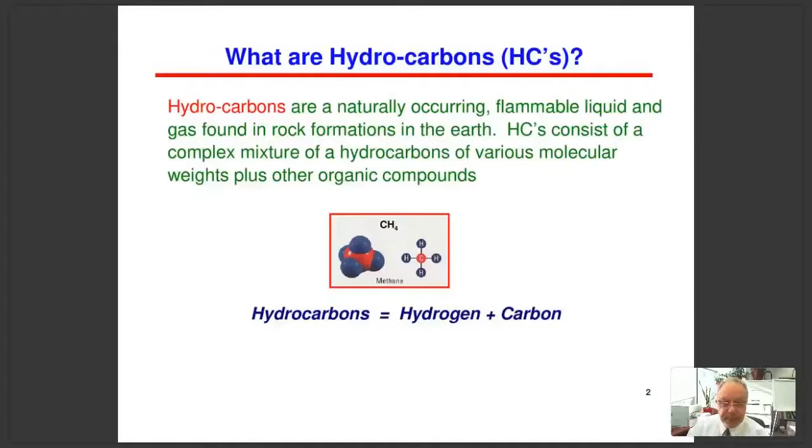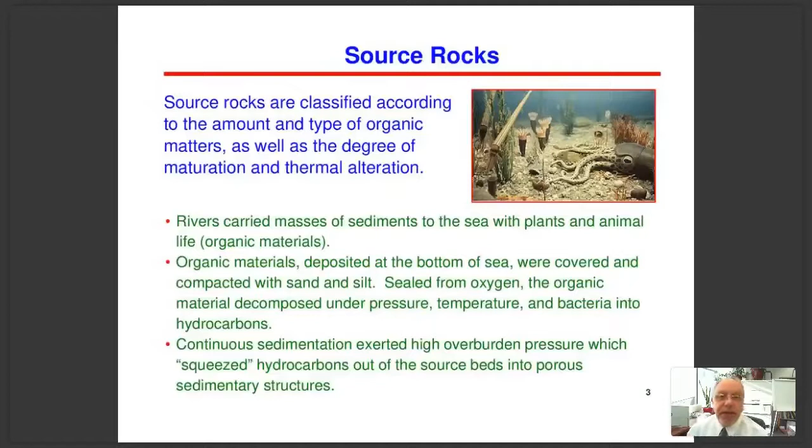So hydrocarbons have been generated from organic material many millions of years ago. Some organic materials like plants and animals were buried, and as more layers of rocks accumulated on top of it, in the absence of oxygen and maybe the presence of some bacterial content, these organic materials started to degenerate and form oil and gas. So basically a source rock, which is usually shale, is behind the generation of hydrocarbons, oil and gas.

Unfortunately, we are running out of the conventional, and basically we are looking now at a different source, which is the unconventional oil and gas. Unconventional means a different kind of hydrocarbon, maybe heavier, not easy to produce, but there's plenty of it on Earth, and we believe we have lots of it for future use. Some of these unconventional sources are shale gas, methane, tight sand - very challenging types of energy. But now we have new technology like drilling horizontal wells and multi-stage frac that we use to exploit the unconventional.

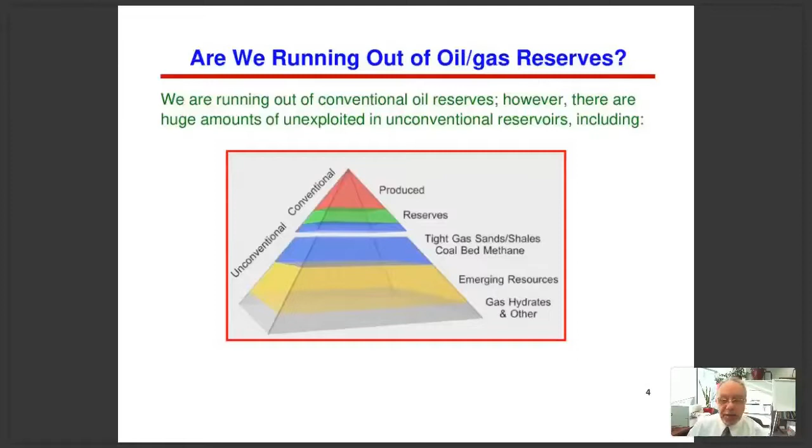Now, how about renewable energy? Oil and gas that we've been using for many years - whenever we use it, we burn oil or gas, which means we emit carbon dioxide into the atmosphere, which is CO2.

CO2 has a negative impact on the environment. Basically, it will cause the greenhouse effect. It will harm our ozone layer, which means it will allow more ultraviolet light to hit the earth, which is harmful to the environment. Also, it will increase the temperature of the earth, which is not favorable. Also, it's bad to inhale - CO2 is not good for human health. So this is the outcome of using fossil fuel.

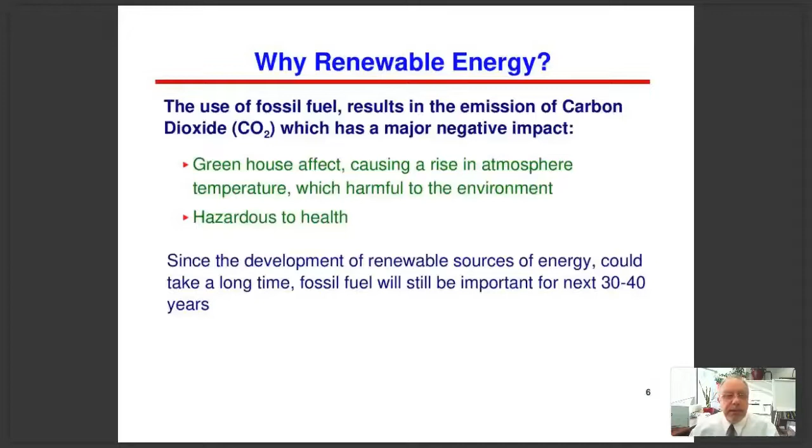So obviously we're looking for a renewable source of energy that is friendly to the environment, like solar energy, wind, hydropower. All of these are renewable sources of energy that do not hurt the environment. However, these renewable sources of energy will take quite a bit of time to develop so we can use them easily in the future. But for now, we're still depending on fossil fuel, oil and gas, which makes nearly 85% of all the energy we use today. So we have to be patient until renewable energy becomes more available.

Now, when we talk about the oil industry, it's a very diverse industry. It has three main phases that we're going to talk about. We start with the upstream, which we're going to focus on in this webinar - it involves exploration, development, and production operations.

So in this phase, we have to do some work on seismic exploration to find where we're going to drill our oil and gas wells, and how we're going to develop a field and produce it and maximize the production. That is the upstream oil and gas.

The midstream is the second phase, where we need to transport what we produce from our wells, which is oil, gas, and water. We have separation facilities to separate the gas from the oil and the water, and basically we get these products for use. The oil and gas, obviously, we're going to need them. The water, we dispose of it.

Now, let's move to the downstream, which is the refining and petrochemical segment of the industry. The crude that we produce cannot be used the way it is - we have to refine it. We have to extract products that we can use, like diesel and gasoline. Also, the petrochemical segment uses oil and gas to produce products like plastic, paint, and even some medicine. So that is the downstream.

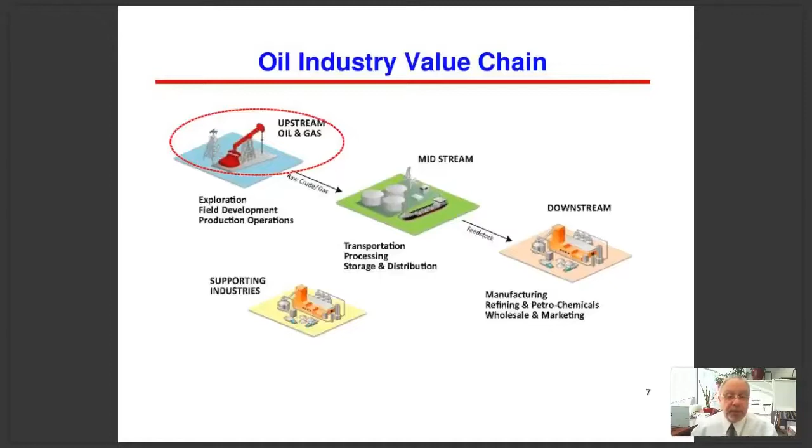The second part of it is the drilling. We have to drill wells, whether it's onshore or offshore, and we're going to show you a video on the drilling aspects. And the third part of this phase is production - how we're going to produce oil and gas, whether it's onshore or offshore.

Now, how can we find oil and gas, and what makes commercial production? Basically, 4 elements must be present.

A source rock is where oil and gas are generated. Usually it's a shale where organic material is buried, and eventually it degenerates into oil and gas.

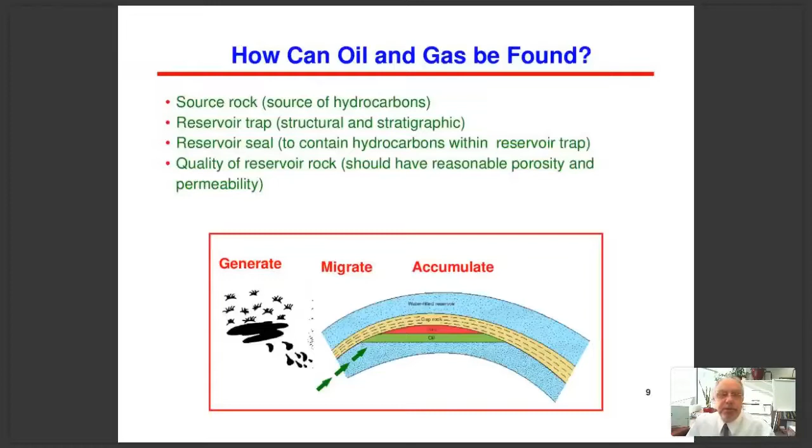Of course, we also need a good quality rock in this trap. It should be porous and permeable, so we can produce oil and gas from it.

Now, when we start exploration, if we have a very large piece of land to work with, like maybe 100,000 square kilometers, it is too expensive to run a seismic survey, because seismic costs nearly $100,000 per one line, per kilometer. So we start with a faster tool.

It's called air surveillance. We fly with an airplane equipped with very sensitive equipment, running magnetic survey, gravity, or stress survey. The purpose of this survey is to allow us to examine this large block of land and define the areas that are prospective. It could be only 5 or 10% of the total area.

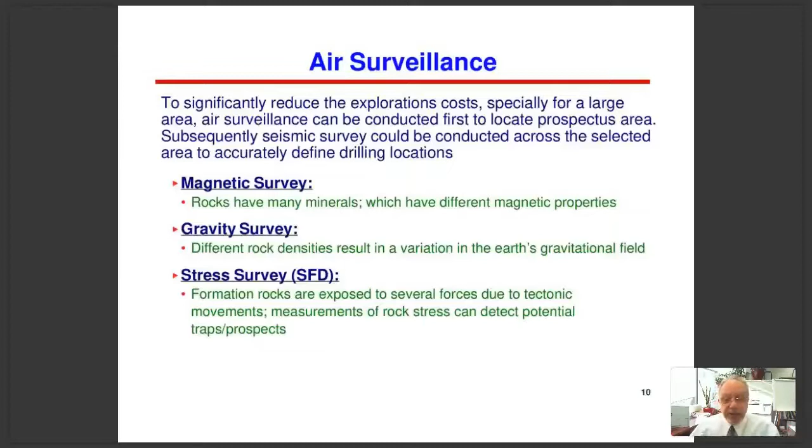Once we have defined this prospective area, then we run seismic only across this part of the big block of land. Seismic is more accurate. It will help us define the location of the well and the depth where we should be drilling. That is air surveillance.

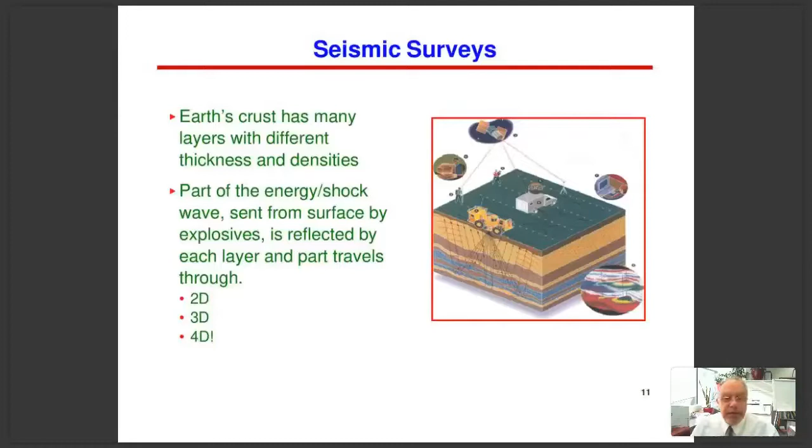From this picture, we can locate the traps or prospects where we intend to drill oil and gas wells. Now, we can also run seismic survey offshore, not just onshore.

You can see there is a seismic boat with air guns. It has compressed air, so we send a blast of compressed air that travels to the bottom of the sea, and below that, this blast of compressed air signal reflects back to the surface.

The ship is also pulling another line called the streamer, which has geophones - the listening devices - to listen to the reflection. All of this data is interpreted, and our geophysicist generates a map to show us what the subsurface geology looks like and where we're going to find traps.

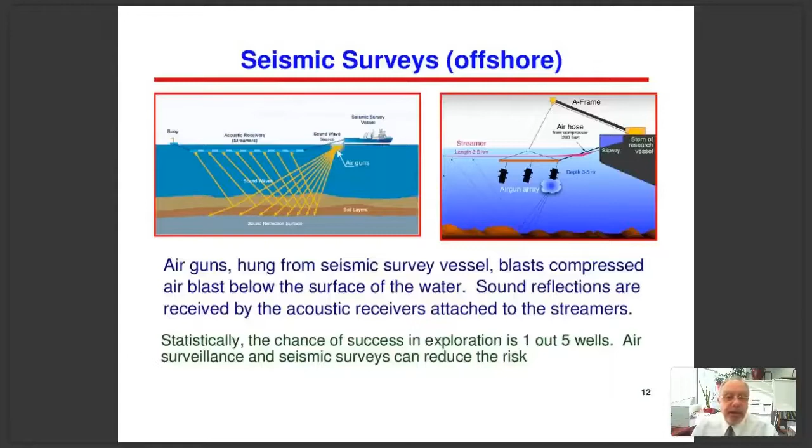Now, when we talk about drilling wells, we have different kinds of wells in the industry. We start with exploration wells. These are the first wells we drill in a new field to verify the data obtained from seismic - that yes, there is a trap, there is a potential for oil and gas.

So the first well is the risky well. Statistically, the chance of success in exploration is 1 out of 5. We might have to drill 5 wells just to have one discovery.

Once we have a discovery, then we drill appraisal wells, basically to define the edges of the field. So we drill 2, 3, or 4 wells on the edges of the field.

Once we define the size of the field and its edges, we drill development wells, which are in the center of the field, to produce oil and gas and exploit the reserve in a reasonable time. Of course, we also drill other wells like disposal wells, because whenever we produce oil and gas, we also produce water with it, since water was there first.

And this water, unfortunately, is saline, so we have to dispose of it. So we drill disposal wells and we dump the water in saline aquifers so we don't hurt freshwater aquifers.

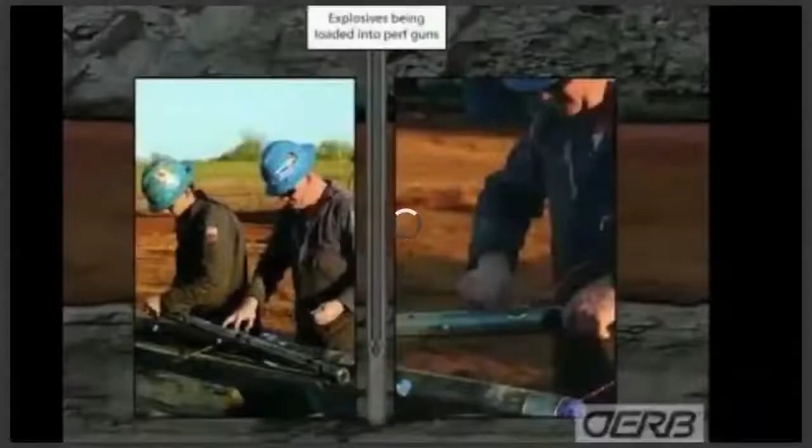The blowout preventer, or BOP, is installed on top of the casing head before drilling commences. It contains high-pressure safety valves designed to seal the well hole and block the escape of underground gases or fluids in order to prevent a blowout from occurring.

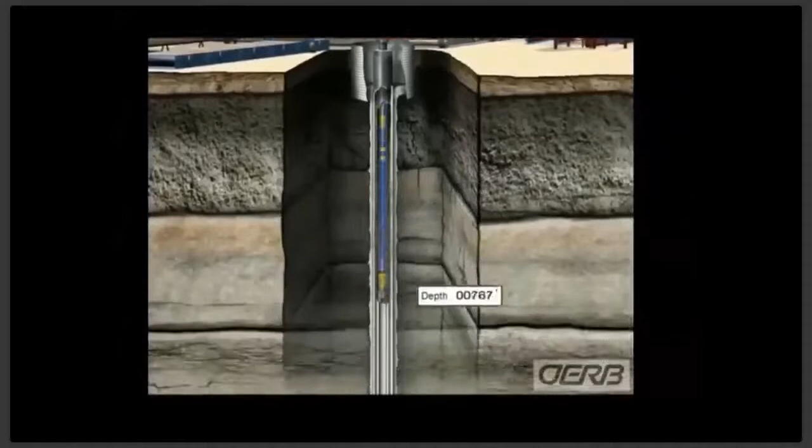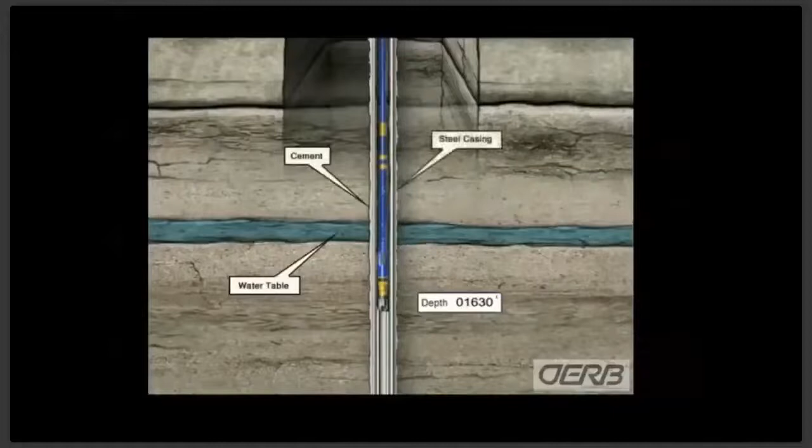Drilling begins with a hole of a designated surface depth, usually about 50 to 100 feet below the water table. Special care is taken to prevent contamination of the groundwater by isolating the water table from the well with cement and steel casing. The bit is the cutting element used in rotary drilling.

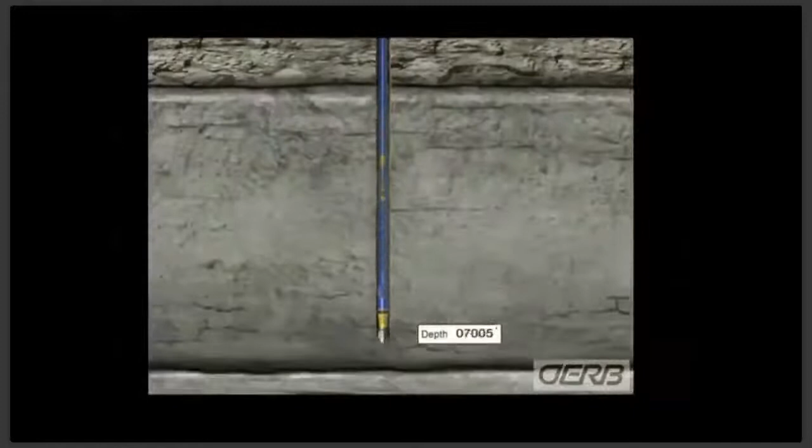As the bit turns, it crushes the rock efficiently, then shoots fluid out to loosen and carry these rock chips up to the surface. New sections of pipe are added to the drilling string as the bit drills deeper.

When the hole reaches a designated depth, the derrick hands circulate fluid through the hole to condition it for logging, the process of measuring and recording the characteristics of the well. The logging information lets the oil company determine if the well indeed can produce oil or gas. At this point, the company will decide whether the well is to be completed or plugged and abandoned.

If the well is designated as a producer, the crew inserts the pipe back into the hole to ensure that the hole is still intact and circulates mud through it again to test the casing. If everything tests positively, they remove the drill pipe and rack it.

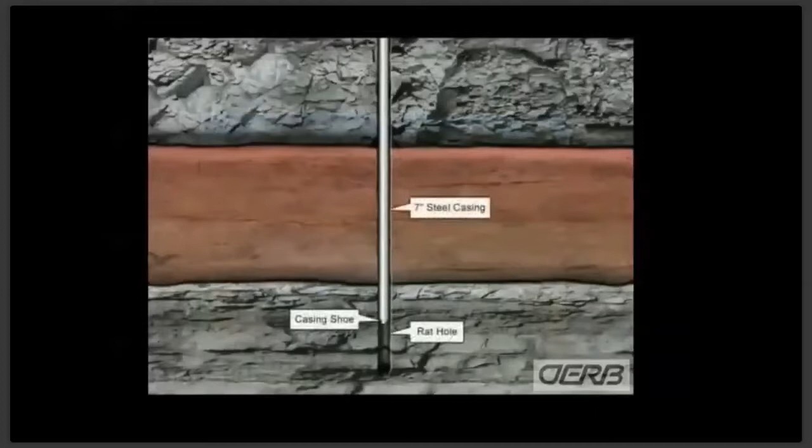At this point, the crew inserts the last string of production casing that runs the entire length of the hole and cements the casing in the hole. The production crew then brings in the workover unit and rigs it up to prepare the hole for production.

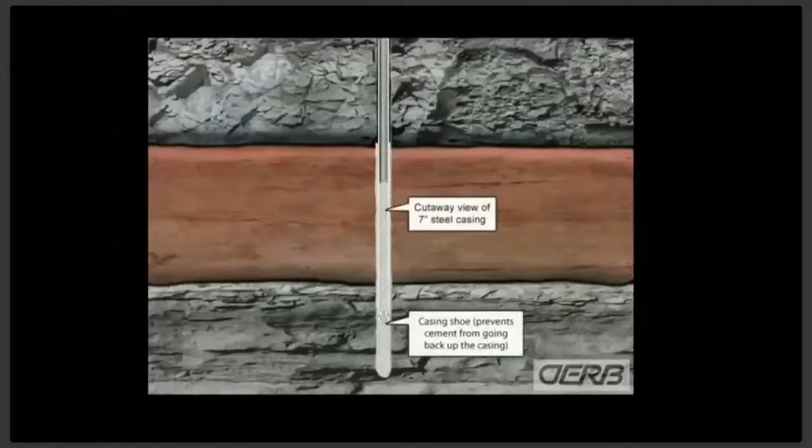The crew runs small diameter tubing into the hole as a conduit for oil or gas to flow up the well. Next, the workover unit trips out of the hole and picks up a perforating gun, which the crew lowers into the well to production depth using a thin metal cable called a wire line.

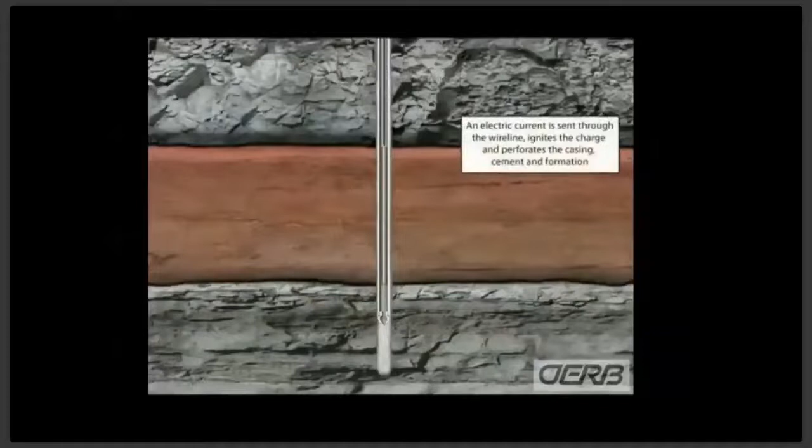An electrical signal is sent down the wire line, firing the gun and igniting explosive charges. These charges create holes through the cement, casing, and formation, connecting the wellbore to the reservoir.

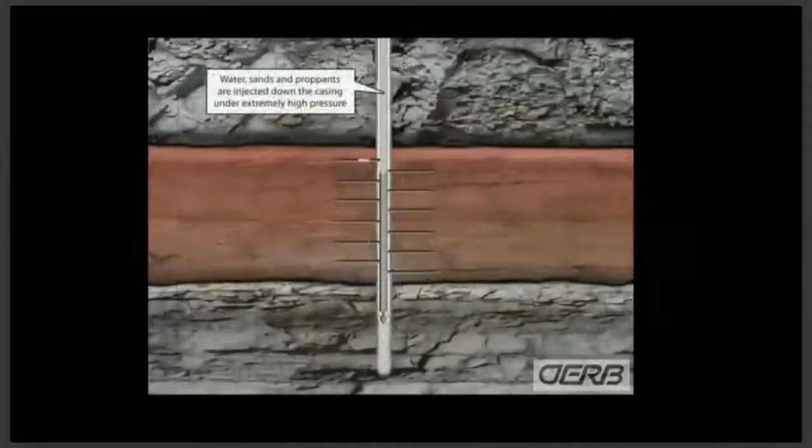To stimulate the flow of hydrocarbons, sometimes it is necessary to frack the well. This involves pumping water, sand, and fluids under extreme pressure down the casing and out through the perforations. The process fractures or forces cracks into the formation. The remaining particles will hold the cracks open, releasing the oil or gas.

Monitoring the flow enables the crew to determine the best size for the choke, the device that controls the flow of the oil or gas.

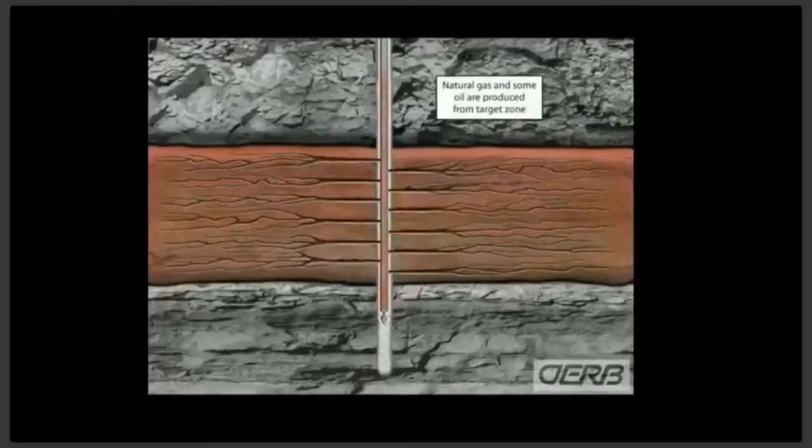Hydrocarbons were created from organically rich deposits subjected to tremendous heat and pressure. This same pressure has kept the hydrocarbons locked in the formation for millions of years. Once the pressure is released, the hydrocarbons are allowed to escape through the fractured zone and flow into the wellbore.

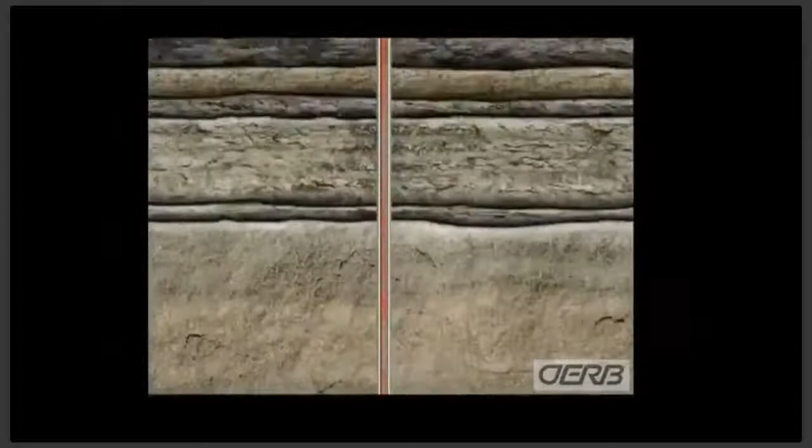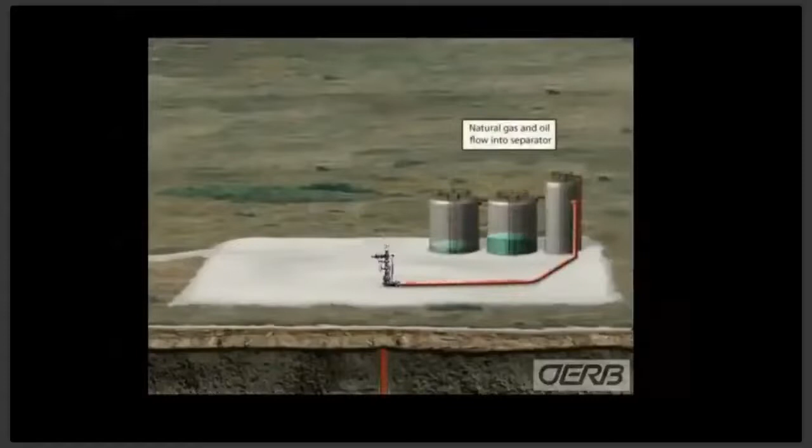The oil and gas can now travel up the casing string. The wellbore is isolated from the surrounding formations with casing and cement, preventing any contamination. The final step is to install a pump jack or production wellhead called a Christmas tree on the well. It is then time to produce the well and plan for any future field development.

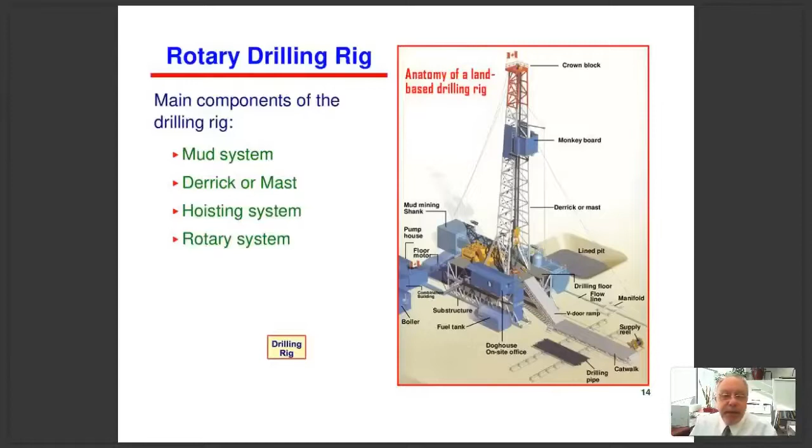You also see a tower, or a mast, or a derrick. From the top of the derrick we hang our hoisting system. The hoisting system allows us to pull the pipe out of the hole, maybe to replace the drill bit every now and then. So it has to be powerful enough to pull out of the hole maybe 7,000 feet of steel pipe. So these are the main components of the drilling rig.

Some of the equipment we use during drilling is the blowout preventer, which you've seen in the video. It's a set of high pressure valves that allow us to control the well while drilling, because sometimes we drill through a zone of high pressure that could cause a kick or a blowout, which is very dangerous. You might have heard of several accidents where a blowout occurs and the drilling rig catches fire.

So the blowout preventer, or BOP, is only used during drilling operations. Once the well is drilled, we get rid of it and replace it with the Christmas tree. The Christmas tree has sets of valves to allow us to control the well, shut it in if needed, or run equipment down the well.

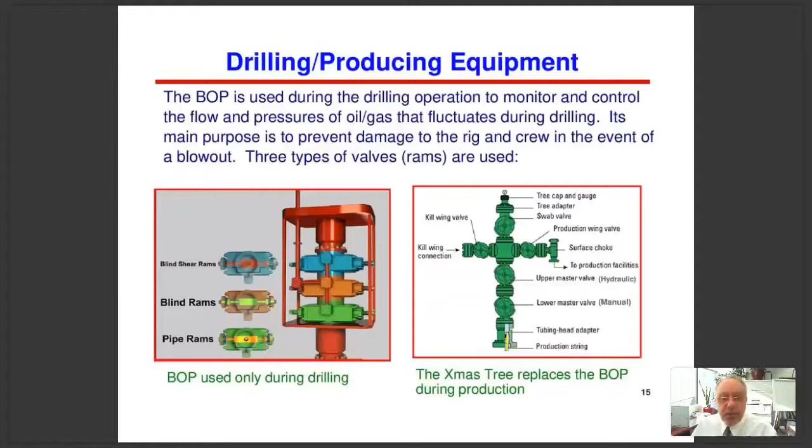At the top there is a tree cap. If we wanted to run, say, a pressure gauge or tools down the well, we can open the top and run the equipment down. There's also a choke at the surface that controls the production rate from the well. So these are some of the equipment you see at the surface while drilling and completing the well.

The purpose of this mud is to clean up the hole from the cuttings. As we create the hole, we crush the rocks, and we have to bring the drill cuttings to the surface to clean the well bore and avoid getting stuck in the hole. Also, the mud cools off the drill bit, which is grinding the rocks and gets too hot. If we don't cool it off, it can get damaged quicker. Also, the mud we circulate in the well keeps the hole from caving or collapsing during drilling.

We have two types of mud: water-based and oil-based. A water-based mud is the most common and the cheapest, made of clay mixed with water. There are, though, some situations where we have to use an oil-based mud, because some formations are sensitive to fresh water, so instead of a water-based mud we need an oil-based one.

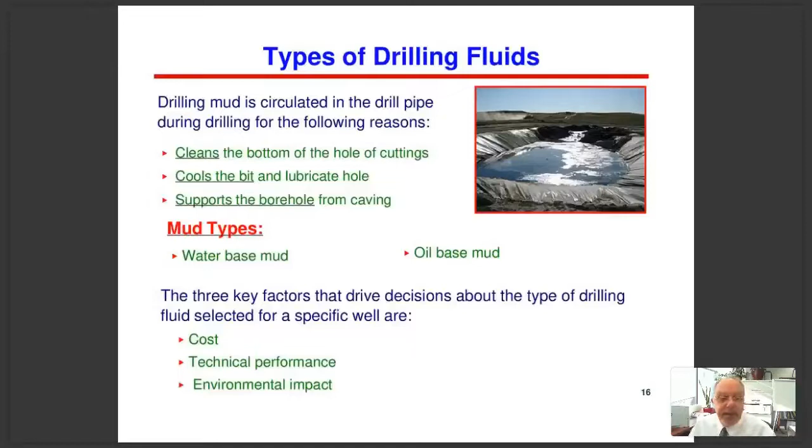An implication of oil-based mud is that when we drill and cuttings come to the surface, these cuttings will be oil stained. So before we dispose of them at surface, we have to go through a cleaning process, because oil is not good for the environment. Selecting the mud depends on cost, technical performance, and environmental impact, so the drilling engineer has to make that decision.

So basically we produce oil and gas. We need to understand how important it is to test the well, so we can tell what sort of facility size and design we should implement, whether it's tanks, flow lines, or valves. All of these will be determined based on how much we can produce from a well. Also, from testing the well, we can tell what sort of production forecast and revenue will come out of that well.

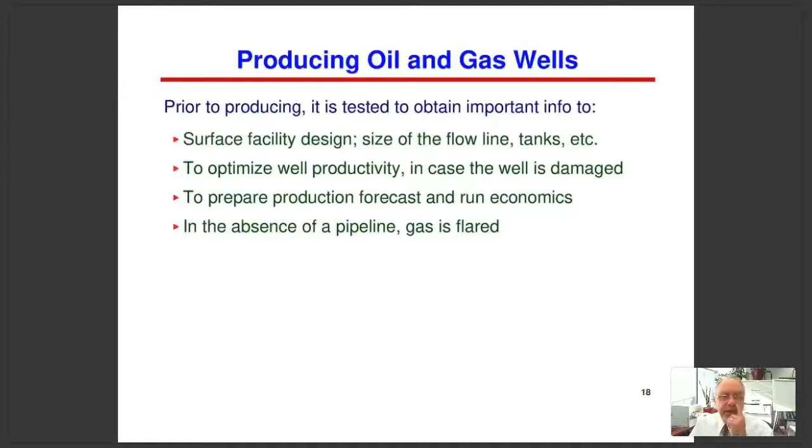For a new well, if there is no gas pipeline yet, while we're testing the well we might have to flare the gas. Of course, there are rules and regulations on how much we can flare, so that depends on where you are.

In some situations, if we're dealing with heavy oil, very viscous like molasses, that oil doesn't flow very nicely. So we have to loosen it up by injecting hot steam. The steam will reduce the viscosity of the crude and allow us to produce large volumes of heavy oil from these types of reservoirs.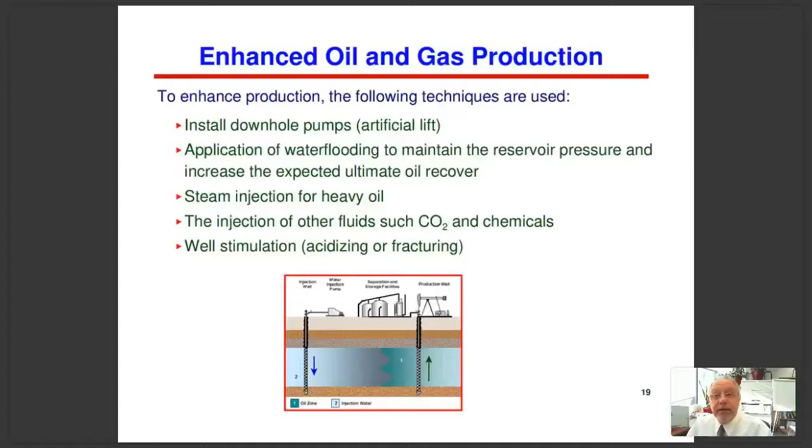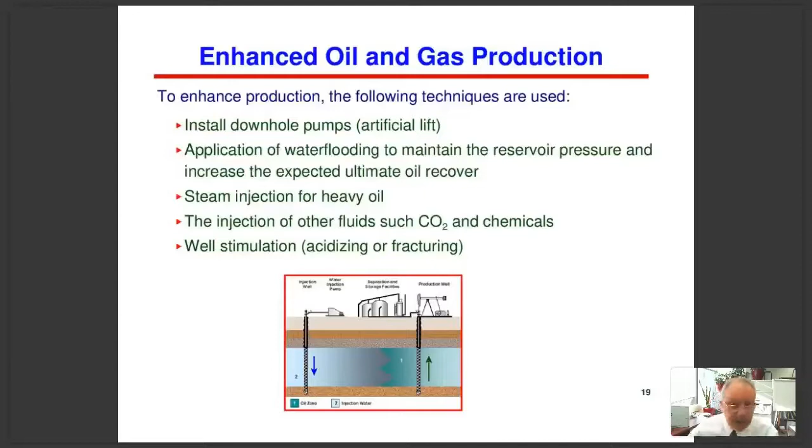There are also situations where we inject other fluids that are more effective than water, like CO2 or chemicals, to recover even more oil out of our oil fields. There are situations where the well gets clogged, plugged, or damaged, so we use well stimulation techniques like acidizing, fracking, or chemicals to allow us to recover more oil.

Now, we produce oil and gas to the surface. We need to store it somehow. Onshore, we have what we call farm tanks. We can store oil or even produced water in them. You'll find these farm tanks present in terminals like harbors or pipeline terminals, so we can transport the fluids.

If you're offshore, we use large ships called floating production, storage, and offloading vessels. Those are massive ships. When you're producing offshore, we separate the water from the gas from the oil on the ship, and we have a shuttle boat to transport the oil.

There's also underground storage in salt domes or caverns. This formation down below the surface is made of salt. By circulating water in it, it will dissolve the salt, and now we have a big space, a dome, where we can store oil and gas.

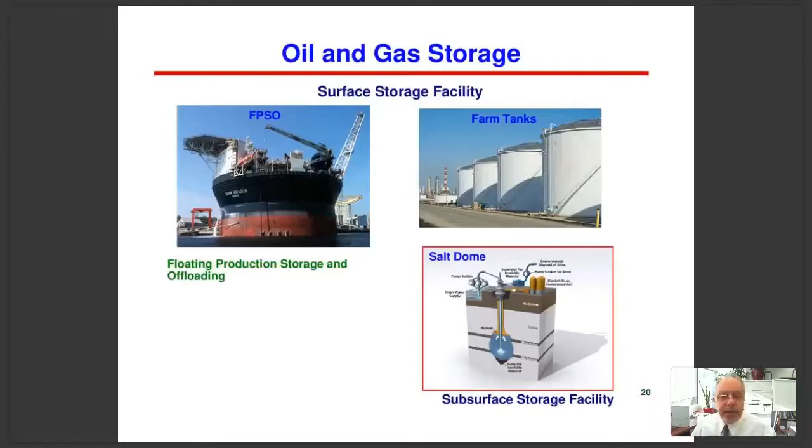Transportation is a very important part of the oil and gas business. We produce millions of barrels every day, along with gas, so we have different options. We can use pipeline, which is probably the most common and the safest. We can use rails, trucks, and even ships.

Of course, using trucks requires more energy, and the same for rails. That's why pipelines are popular, and there is a massive network of pipelines in different parts of the world, North America, Europe, or Africa.

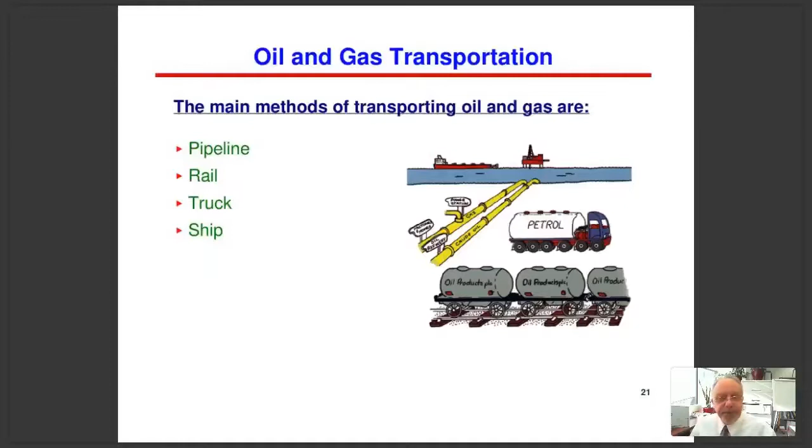We mentioned earlier that the crude we produce is not usable unless we treat it. So we have refineries and petrochemical plants. In refineries, we extract useful products that we can use, like gasoline, diesel, and jet fuel. All of these are products produced from refineries.

Petrochemical plants are also very important because there are products we use every day made of oil and gas, such as plastic, solvent for paint, ointment, wax, polish, and asphalt. All of these are products that we extract from the crude in petrochemical plants.

In addition to the liquid, we have the gas. We have natural gas that we produce. Anytime you produce oil, it does have gas in solution in it. So we have natural gas like methane and ethane, which we use for heating our homes or for domestic use like cooking, whatever you need at home. There's also liquid like propane and butane, light liquids also extracted from the crude.

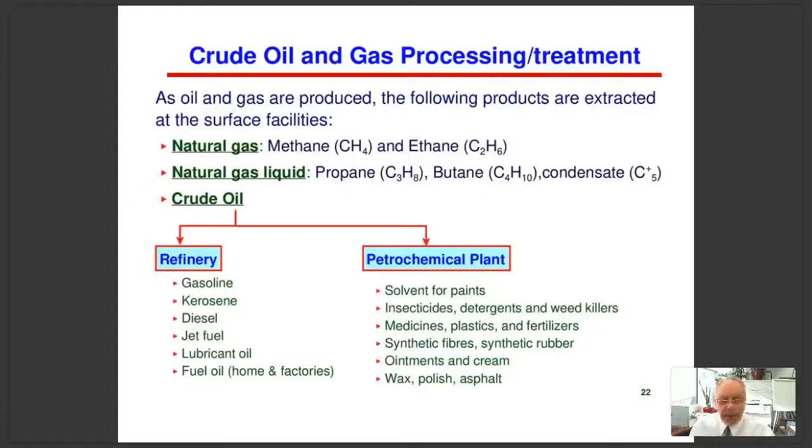Decommissioning, every success story has an end. When you produce an oil field or gas field, you can't produce it forever. There will come a time when the field is not commercial or profitable to produce, so we have to decommission the facility.

The production life of a field depends on the size of the reserves and how much you're taking out every day, which affects the production life. There are many activities we implement to prolong the life of the field so we continue to have cash flow, like introducing water flooding or any type of chemicals.

But there comes a time when we reach the economic limit, meaning we're not making money. The economic limit is dependent on the operating cost, the price of oil and gas, and the remaining reserves.

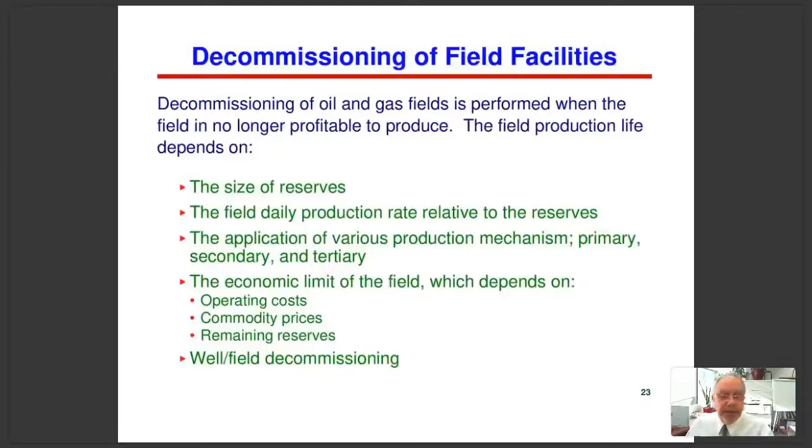Decommissioning means we need to remove all the surface facilities. In this picture, you see some facilities like a pump and tanks. By decommissioning, if you look at the picture to the right, we bring the surface back to the original condition as if there had not been any production whatsoever from this location.

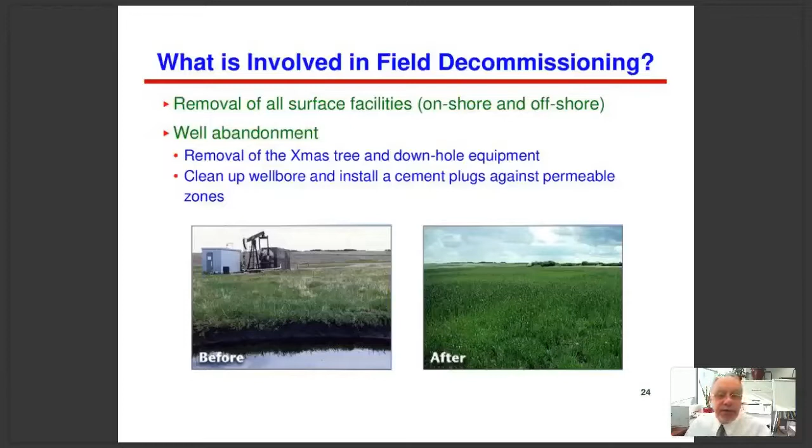Decommissioning also involves abandoning oil and gas wells. To abandon a well, we have to remove the Christmas tree, which is that set of valves at the surface, clean up the well, and dump cement plugs in the wellbore across permeable zones to not allow any flow from zones that are porous.

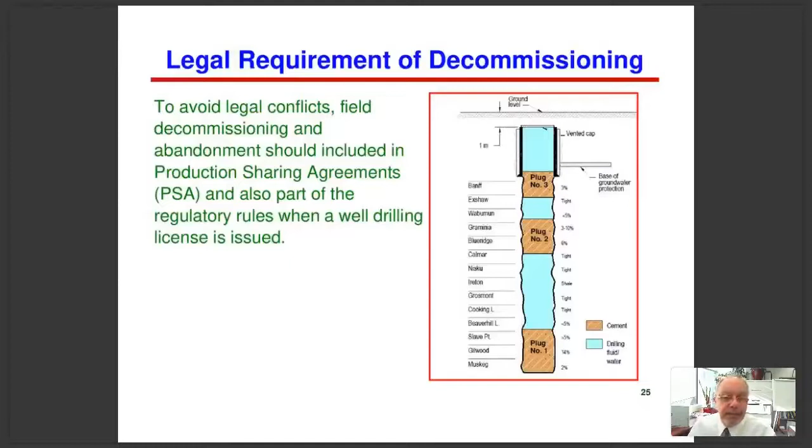Of course, the process of decommissioning requires planning, even from the day that you drill the well. We need to commit a certain fund when we drill a well, put into a trust fund, to allow us to abandon the well, because that costs money at the end of the production life. We don't want to drill a well without funds to abandon it. That's what we call an orphan well, a well that has no legal ownership and nobody's looking after it. So we need to avoid that situation by planning ahead, putting aside enough funds for decommissioning.

Decommissioning or abandoning a well onshore is not that expensive. It could be maybe an average of $35,000 per well onshore. However, when we talk about decommissioning offshore facilities, we're talking about millions. It could be $30 to 40 million to decommission an offshore platform.

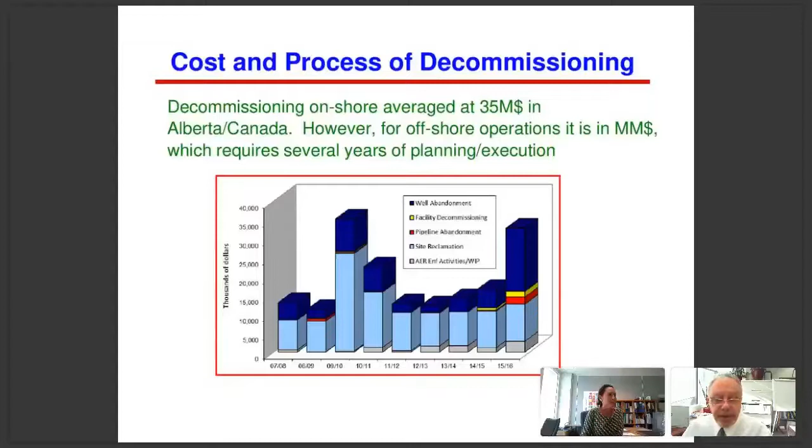It also takes a long time to plan for it. We can't just decide to abandon or decommission a field in a month or two. It takes several years of planning to decommission the field. So that will take us to the end of my section.

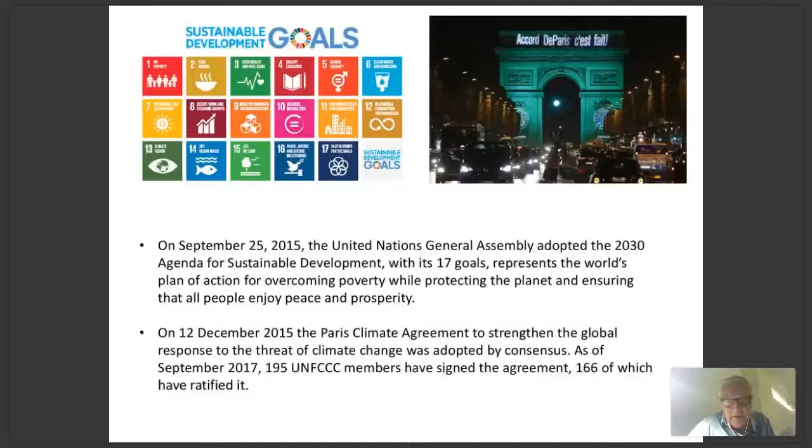Now both of them, the Agenda 2030 and the Paris Agreement, are important for the oil and gas sector, and I'd like to dwell a little on that. The Paris Agreement says we have to stay below 2 degrees centigrade. Some of you asked, shouldn't we be moving quickly to renewables? Yes, that's true, but on the other hand we're not going fast enough, we know that. So there will be, as Saad said, a necessity to still deliver our energy needs by fossil fuels. We have to do that, however, with a concern about how to capture the CO2.

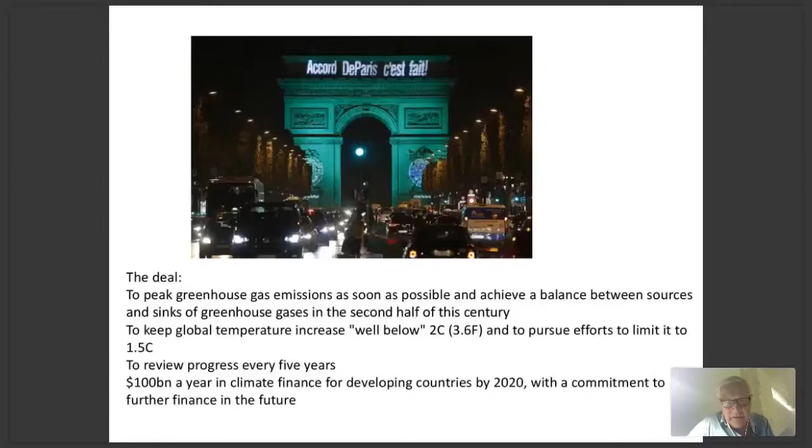Some of you asked about water. Water is a very peculiar issue because, like every industry, like humans, the oil and gas sector needs water. Saad mentioned the drilling issue - for drilling you need water to make the muds, and you need water for humans. But the funny thing about the oil and gas sector is that it also produces water. When you pump oil and gas up, probably more with oil than with gas, you actually bring water to the surface as well.

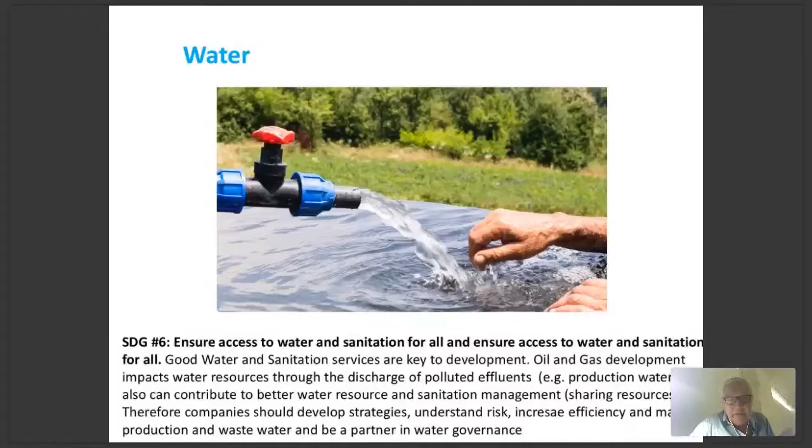So what you're left with is basically two options: discharge the water to a saline or non-potable aquifer. In other words, you discharge the water subsurface, and you have to do that in a safe manner, of course.

But on the other hand, it's very obvious that if you bring water to the surface and you're actually operating in a water scarce area, that water may be of use to somebody else.

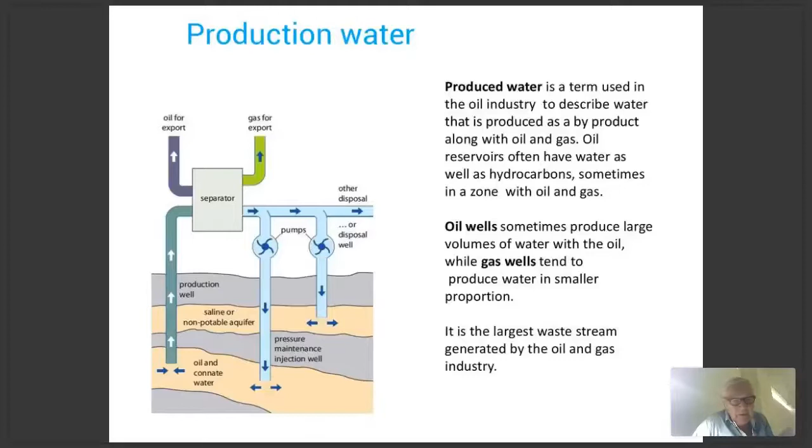But you can see two things here. One is that the oil and gas sector doesn't want to use this water for crops which are consumed by humans, because that link is a little bit too far, so they produce fiber crops. The second is you can only do that if the salt issue is manageable. In this particular case, because we're in the southern part of Oman, the production water salinity was about a third of seawater, so you can do that.

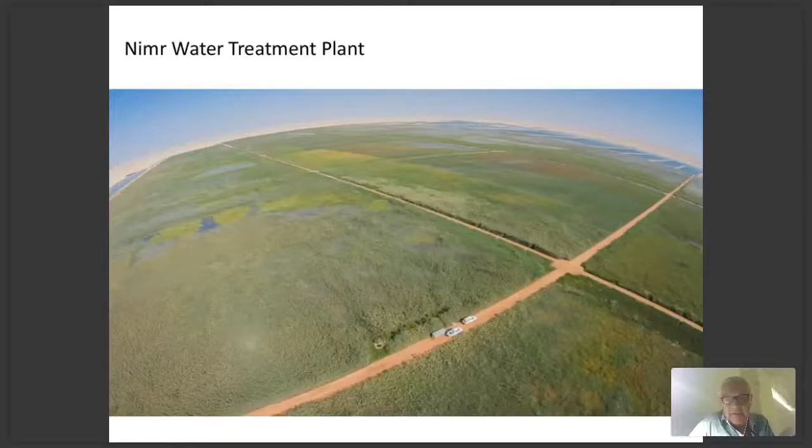So there are many ways to deal with the water issue, and I'm happy to answer any questions when we talk about water further.

The oil and gas sector has something which is in the middle of the Agenda 2030, and it says we need to have sustainable growth. This has just happened in my own country, the Netherlands, and that's why it's called the Dutch disease: the money wasn't used to invest in the future, but was used to fill gaps in the past. So there is a warning here that it's great to think about oil and gas development, but at the same time you have to manage the economic consequences in a positive way.

Infrastructure is key to me. Why is that important? Because, as some of you already said, the oil and gas sector needs a proper infrastructure, in particular for its waste which is generated. We've seen too often in the past that infrastructure wasn't available, and governments look at the oil and gas sector to develop that infrastructure, which could be done, but it is not necessarily the role of the oil and gas sector to do that.

Just to get a quick overview of the type of waste being generated, I think it's probably fair to say that this sort of waste is generated from the drilling process onwards. It's not necessarily generated during the exploration phase.

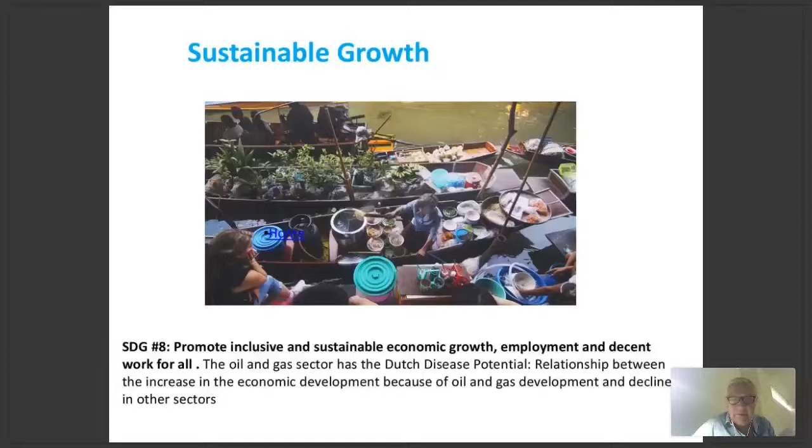In the country I grew up in, the Netherlands, we had a big gas field and we did exactly that. We used the money to address things which went wrong in the past, and we didn't really invest in the future, and that's why it is called the Dutch disease. So oil and gas has this positive potential in terms of economic development, but it's also very sensitive to negative aspects. That's why you read sometimes in the newspapers about the black curse, the Dutch disease, because that all means that the money earned with the oil and gas is not properly used.

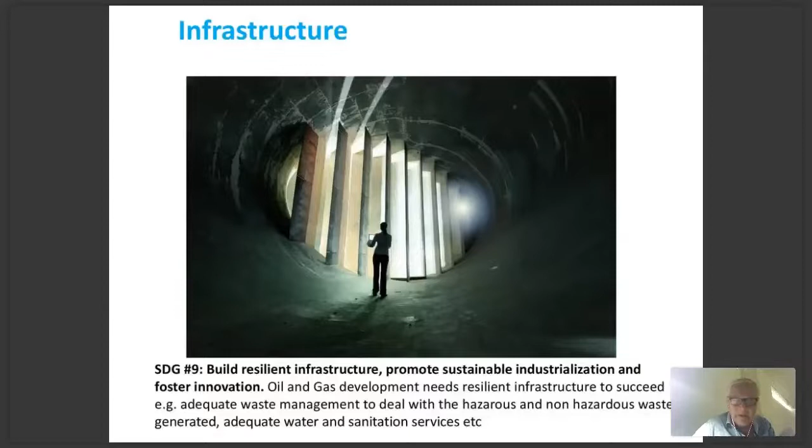So what I then said was that infrastructure is very important to me, because the oil and gas sector depends very much on good infrastructure in the country itself. It generates peculiar wastes which are common in any country produced by industry or by humans, but it also produces specific waste, in particular oily waste. I'll talk a little bit later about the chemicals being used.

What we see happening is that drilling produces cuttings and uses drilling fluids. Drilling fluids will be reused to the maximum possible, but ultimately some of it will have to be disposed of. The tank washings have to be dealt with. If those are oily tanks, then it means you have oily waste, and we have to deal with that. Saad mentioned that oil is a natural product, so you can use biological systems to deal with it, but you need to manage it.

Then you have the non-hazardous solid waste: metals, wood, glass, construction waste, packing material - material which is common for any country and has to be dealt with at a national level. The oil and gas sector can help to set this up, but it is not necessarily the main driver for that. Hazardous waste, we'll talk about chemicals in a minute.

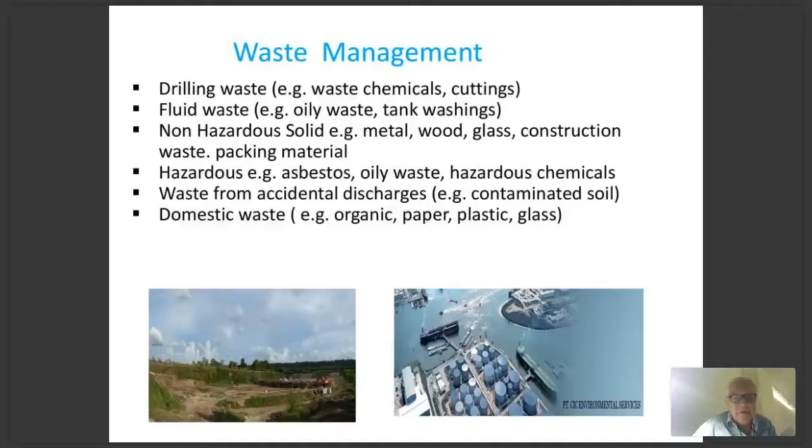Of course, for hazardous waste you need specific facilities to deal with that, normally incinerators. Waste from accidental discharges, we'll talk about that in a minute when we discuss contingency planning. Domestic waste is basically generated by humans and has to be dealt with. So the oil and gas sector can help develop that infrastructure, but cannot necessarily be obligated to do so, because it's part and parcel of the wider waste management infrastructure development in the country.

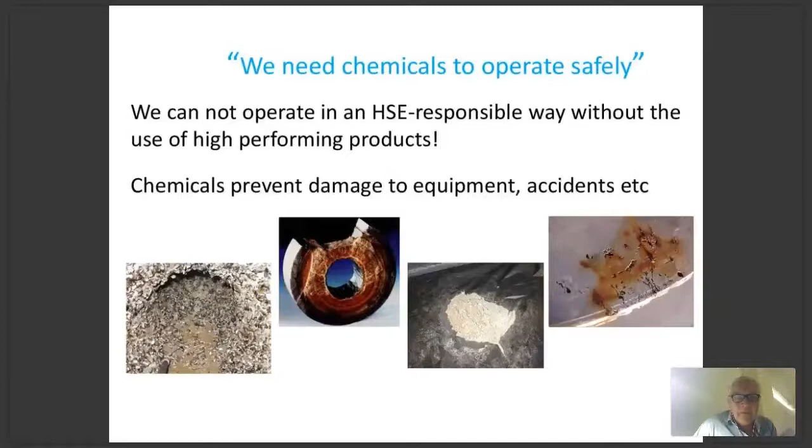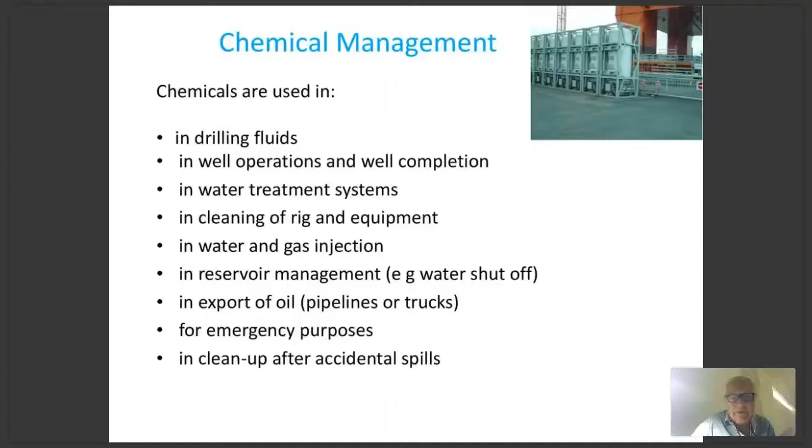So why do I keep chemicals apart? Because chemicals are something rather peculiar, and they're used a lot in the oil and gas sector. In the next slide you see where it's being used - if you looked at Saad's presentation, it's almost used in every step he mentioned. You use chemicals. That's fine, and you need that from a production perspective, but it also generates a bit of a headache for those of us who have to deal with the consequences of chemical use in terms of discharges.

One of the things which happened a lot in the past, particularly offshore, was the idea that if we throw it into the rivers or oceans and dilute it, it's all fine. But that doesn't necessarily mean it's the right way of thinking, because here you see a slide about bioaccumulation and biomagnification. It means the concentration of the chemical discharged in an aqueous environment actually increases, and ultimately the osprey here, which is at the top of the food chain - or humans, if you put a human on top of the food chain - are being affected by the chemicals we discharge.

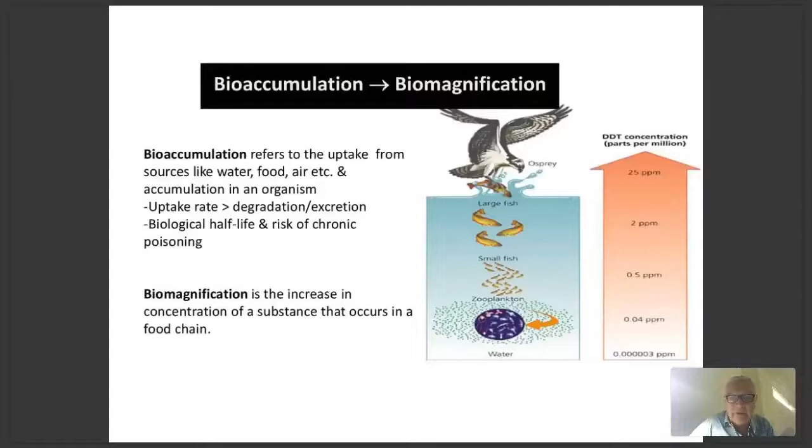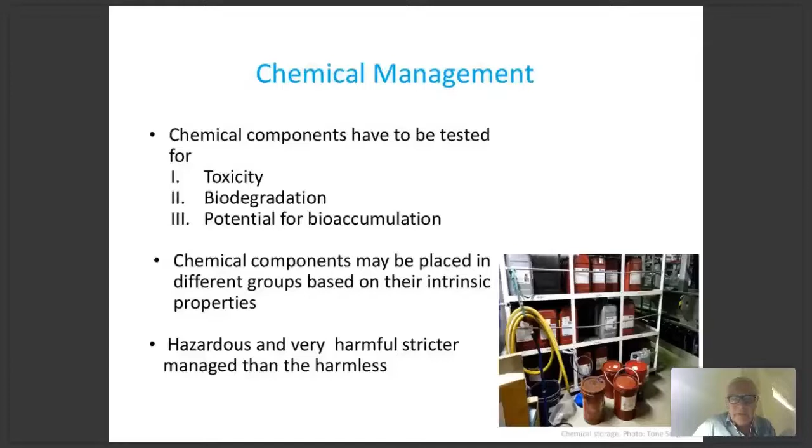So climate change. We talked a lot about the issue of getting below 2 degrees centigrade. Now there are two ways to deal with that. One is, of course, we have to transform and use more and more renewable energy. We know that's not always possible, but okay, that's what we have to do. And at the same time, when we produce oil and gas, we have to reduce the CO2 or the greenhouse gases associated with the development of that.

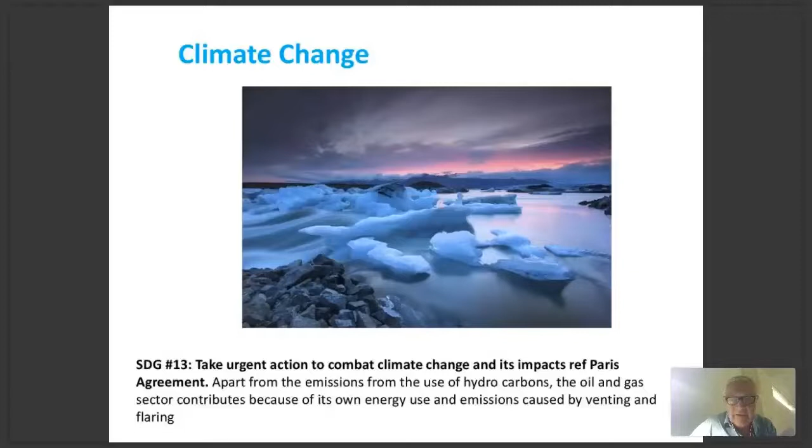Saad mentioned that a little bit, but I'd like to highlight two practices which we see a lot. This is a picture from the Middle East, and I'm sorry for those in Qatar, Oman, and Bahrain that I took a picture from your region, but a lot of flares are there. Basically, a flare is a system that allows, in case of safety, the gas to be removed. But what is happening a lot is that those flares are being used to burn gas which is deemed uneconomical to collect.

So in other words, we flare a lot more than we should. We should be dealing with that. In some countries, the country actually says we are not allowing that to happen. It is happening, and we should reduce that absolutely to zero.

Then there is this other case, the same gas, but it is not being flared. It's sort of vented, so basically we don't see it. It's the leaks, the stuff which harms the environment even more, because the greenhouse potential of the gas is 21 times higher than CO2. So we really have to deal with that.

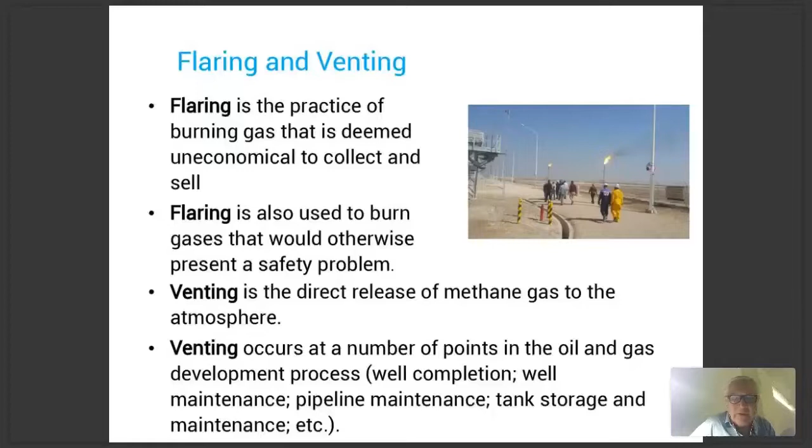Fortunately, woken up probably by the Paris Agreement, major oil companies are dealing with that and will reduce the leaks and the venting. But the environmental concerns are clear.

I'd like to highlight, and Saad mentioned something about that, local air quality. We cannot continue to burn all sorts of gases uncontrolled in areas where communities are also living. So local air quality in this context is new, but it is extremely important.

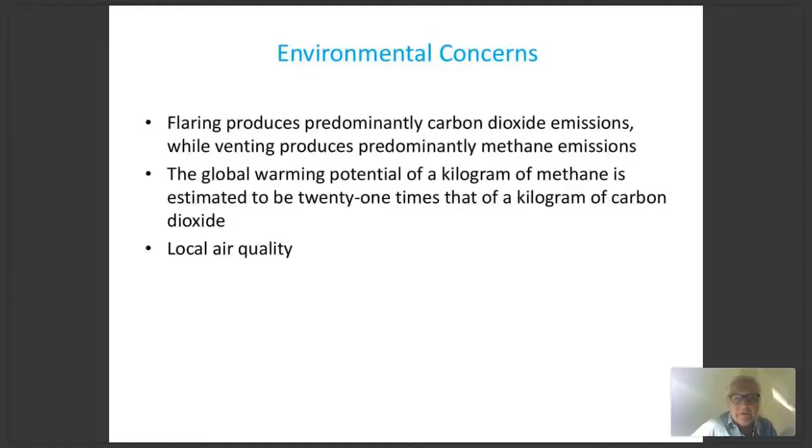Oceans. To me, oceans are very important in the sense that we seem to forget that that's a natural infrastructure we have available to us. It produces food. It's being impacted by climate change.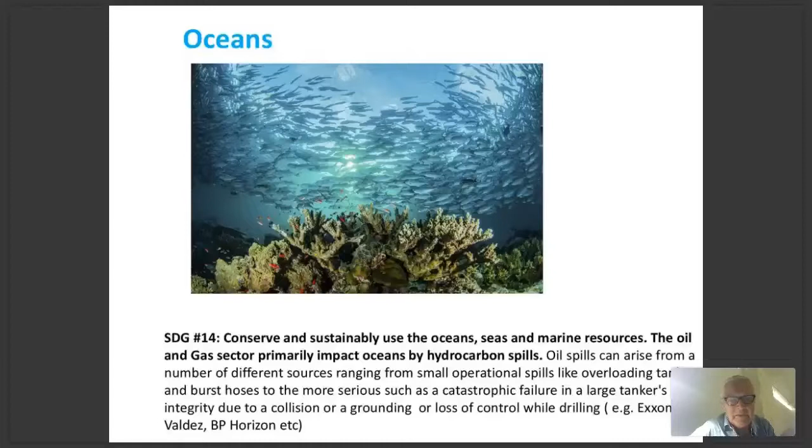That's all true, but there's plastic issues associated with it, and I don't want to focus on that because that's not necessarily an issue of the oil and gas industry. What I wanted to focus on was actually the oil spills.

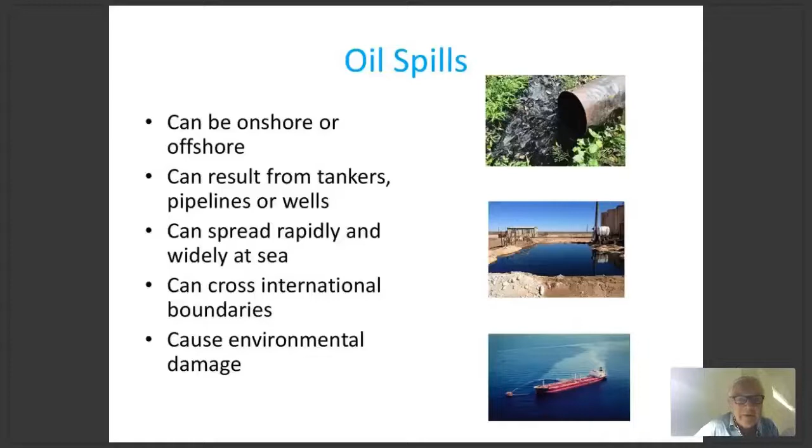We do know that spills can happen onshore and offshore, but offshore they usually are much more sensitive, because they can spread very rapidly and they can cross very easily international boundaries. So I'd like to spend a few minutes on that.

Of course, we don't want oil spills. Nobody wants oil spills. The oil and gas sector doesn't want spills, but it happens. And when it happens, you can see these sort of environmental impacts.

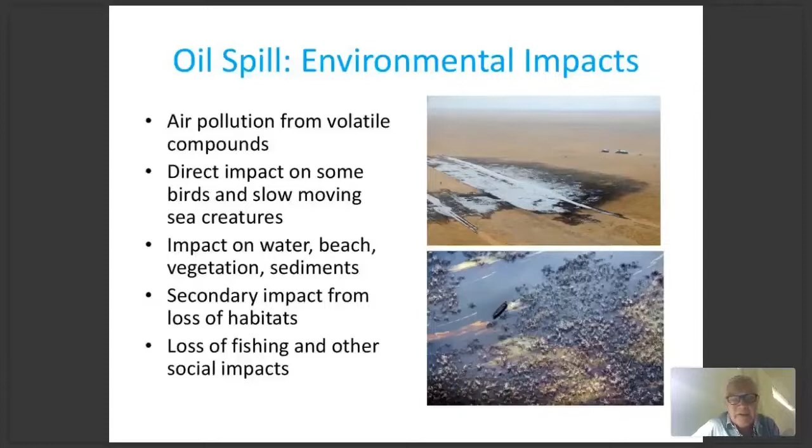The way we deal with that is we actually map our shores in a way that we understand the environmental sensitivity of the shores. I just took an example of Zanzibar. You can see that all the coastline is mapped, and it is basically mapped according to 5 ecological sensitivities. Basically what it means is that you put all your major effort in the first instance to protect the most ecologically sensitive area.

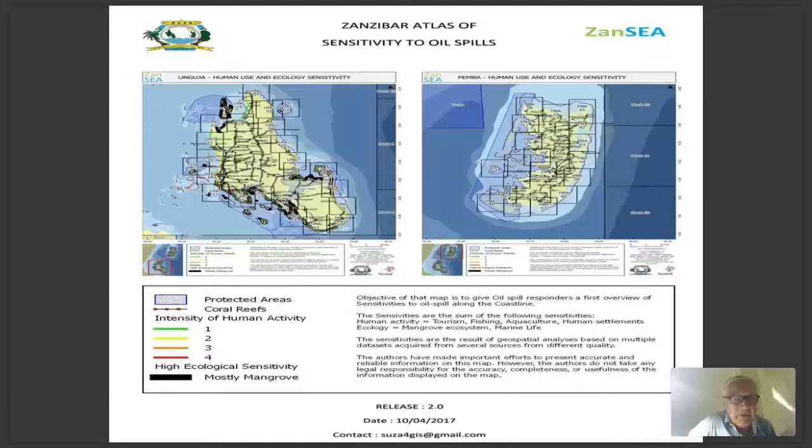In this case, it is mostly mangroves. And basically, if you have to make a decision about what you're going to protect, because that's another issue altogether, you would actually sacrifice the beach in order to make sure the oil is not reaching the most environmentally sensitive area. Now, and I stop here.

This is the last slide, so don't worry. I only wanted to make sure that, of course, the government is responsible for ensuring that the system is in place, that they have their response structure in place, that their operations are there.

However, there is another important component which I'd like to share with you, which is the tiered response structure. Basically, it says that for all small spills - and you can argue what is a small spill - a spill in an area of a mangrove system is not a small spill because it is very high risk, as somebody already mentioned.

But small spills are actually being, or should be, dealt with by those who spill - in this case, the oil company. If the spills are bigger and the oil company cannot handle it with their own equipment, it has to work together with other oil companies or with the government to make sure the risk is reduced to acceptable levels and the equipment is deployed and the risk is managed properly. Ultimately, we have the large spills, and we just don't want large spills.

I mean, tier 3 spills - that's when you actually get all the equipment in the world in your backyard, and you try to do as best as possible. Those of you who follow the news know that these are the big spills which are in the minds of most of us.

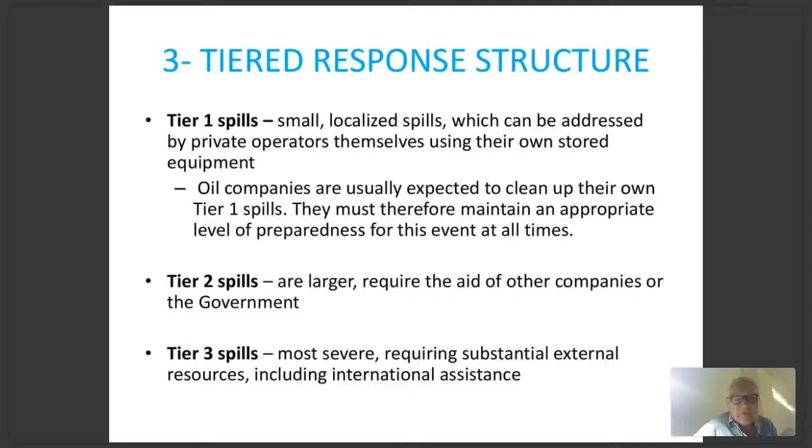So we talk about the response structure, not necessarily about the reasons why these spills are there. But rest assured that in a tier 3 spill, everybody comes together and puts all the equipment they have available, and all the brain power comes together to deal with that. These three tiers are very important underlying principles which most countries have adopted in terms of response structure.

So biodiversity - I just wanted to highlight this. We talked, and Saad talked about there being enough oil and gas, and we're going to places where the areas are unknown to us in terms of biodiversity, and we really have to start looking at the impacts the oil and gas sector has there. Should we allow oil and gas to be explored in those areas or not?

So biodiversity is a very important decision component, and it basically means that the oil and gas sector and governments - I'll come back to that in a second - are fully aware that you are possibly sacrificing something which is very unique for something which may not necessarily be the way forward. So that's biodiversity.

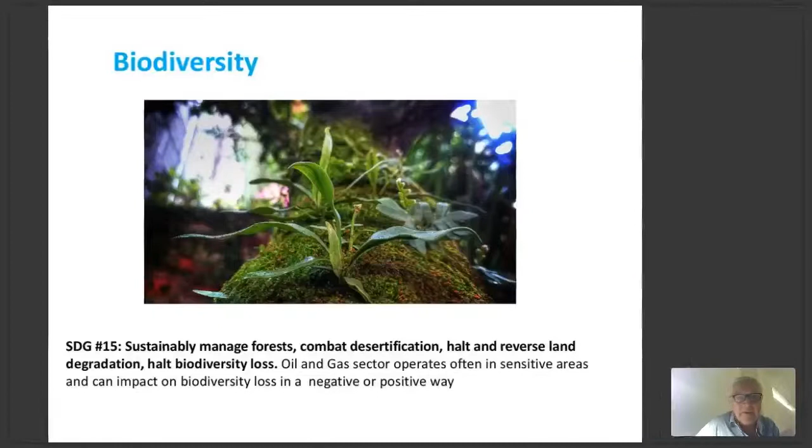So yes, the whole issue of partnership is important. But ultimately, there's only one institution which is responsible to regulate the oil and gas sector, and that's the government. So I'd like to, so when we end up...

We say this a lot - good environmental governance is very important. In other words, having a robust legal framework, including principles for implementation - and we talk about environmental impact assessments here - is important. Transparency and stakeholder participation should be clearly stated in the robust legal framework. Compliance, auditing, and monitoring - we don't talk a lot about that, but it is important that the oil and gas sector feels that the government is looking at them, and looking means auditing and monitoring. And if they don't comply, just sanction them, and really have a lot of people available to you to do that.

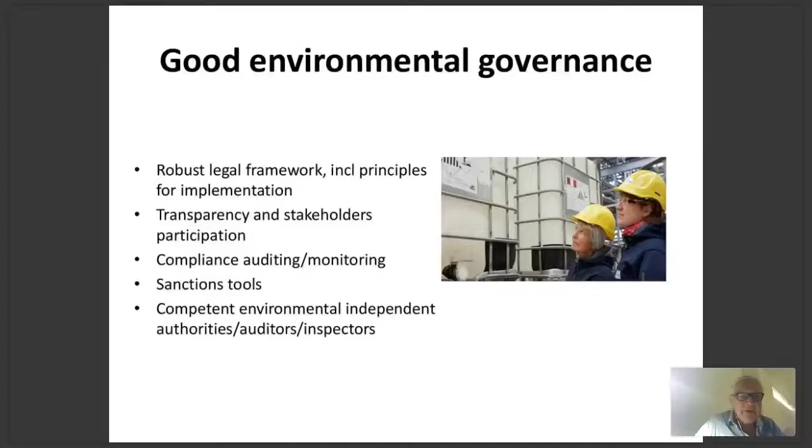Ultimately, what is the legal structure? Depending on the country, you either have a constitution or not. Sometimes laws and acts are important, and they drive the regulations, and ultimately you have individual permits and decisions. Normally the oil and gas sector says regulate everything in proper laws and regulations, because then you have a level playing field, and it's important for stakeholders that there's clarity in laws, regulations, and individual permits. God knows what can happen in individual permits.

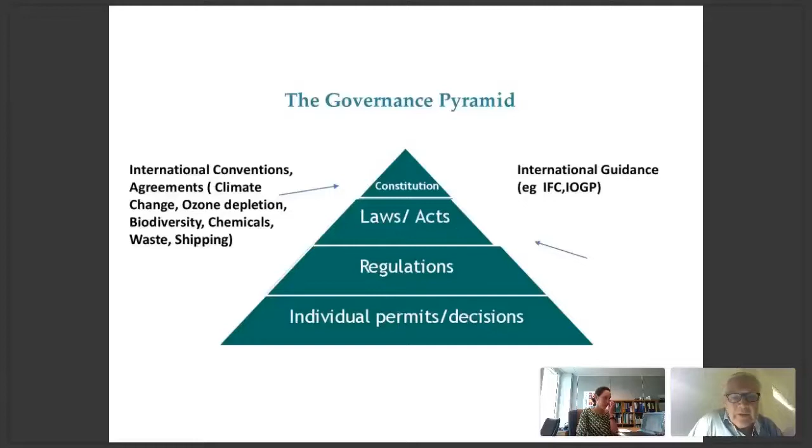Now, this triangle is influenced by what's happening in the global world. This is the national government, and you have a lot of international conventions which countries subscribe to, and that has to be translated into legal structures in the country. Marisol asked me about this, and I said I have six pages of climate and environmental conventions and agreements which could be relevant for oil and gas, so this isn't something we can cover in 20 minutes—I'm happy to share that later. But there's another interesting component we talked about: international guidance on how oil and gas should operate locally, from the International Finance Corporation. Basically, Marisol kicked me out, so that's what I wanted to say. Marisol, I'm ready.

Hi, okay, I just realized I wasn't actually heard. I just wanted to thank Joppe for the presentation—I think it provided a very good overview of all the environmental considerations one must take into account, even just for the upstream sector, from the starting point of exploration to drilling and production. So I think we've reached a point in our webinar where we can start to address some of the questions.